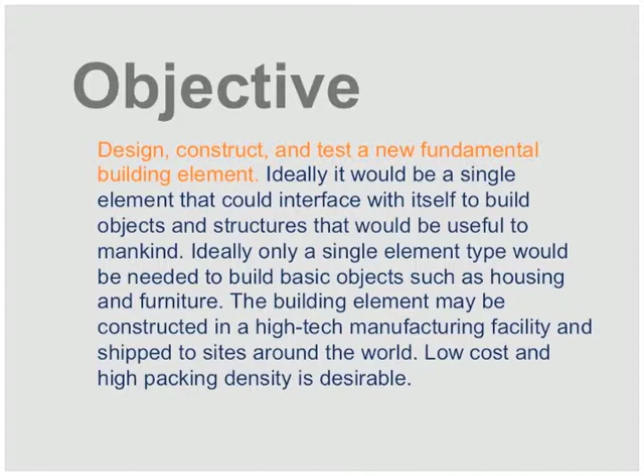And we would want to be able to use this element type for building things like furniture or things like housing. Now, this element can be constructed in a high-tech manufacturing facility and shipped to sites around the world. So for this reason, we will be quite interested in low-cost elements and elements that can be packed in high density. Now, let's dig in a little bit deeper at 5 sub-goals.

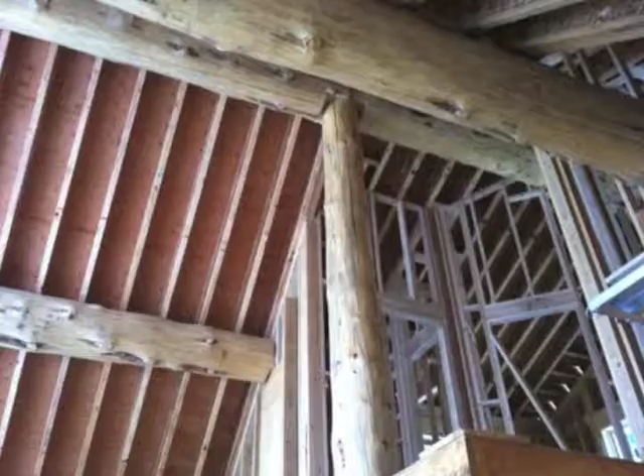The first sub-goal is to develop a modular building system that has a minimal number of unique parts or modules. To better understand this, consider construction in the developed world. That's what this picture represents here. And in this picture, we can see at least 8 different building element types. We also can see a large variety of dimensions to which those materials have been cut.

For this reason, construction in the developed world is expensive. It takes the management of all those different kinds of element types. It takes a craftsman who knows how to size them, cut them, and assemble them together. This is one of the large reasons why housing is inaccessible to so many people in the world. It's because housing can be expensive.

Let's consider the complete opposite of this. In this case, the hexayurt, designed by Vinay Gupta. This is a good representation of how construction can be handled at the complete opposite end of the spectrum. In this case, 12 4x8 sheets of foam or plywood can be used to construct the hexayurt.

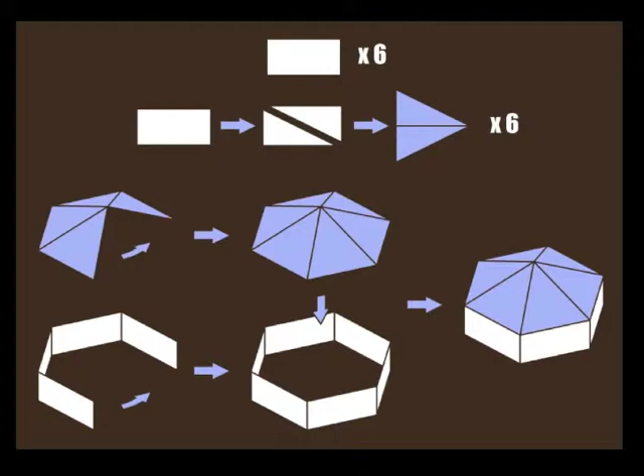The second sub-goal is to develop a modular building system that has a minimal number of unique joints or interfaces. Again, considering the hexayurt, we can see that a fiber reinforced tape is used for all of the joints. In this case, one interface type used everywhere. You can imagine the complexity that grows if we try to have different interfaces for every joint.

The fourth goal of the project is that we develop a modular building system that is inexpensive. A great benchmark here is the ShelterBox. The shelter box is a box that's shipped around the world where disasters have occurred, and in the box is a number of supplies to help a family through the recovery process, including a shelter. And in 2012, the cost of the shelter box averaged $874 US. The hexayurt with the foil backing is estimated to cost $500.

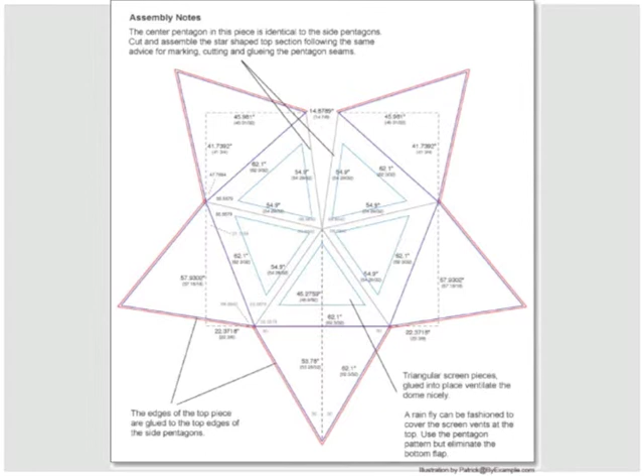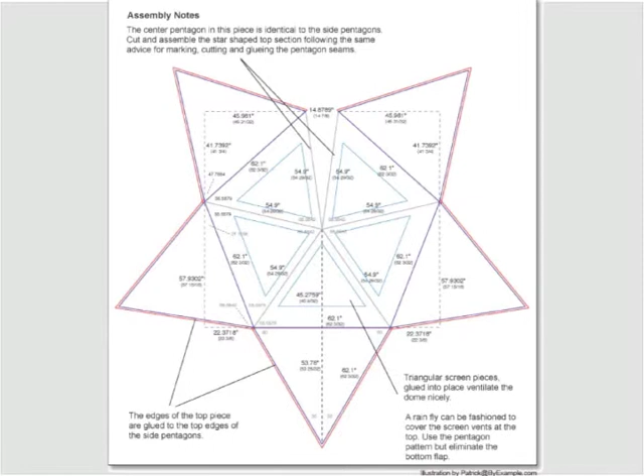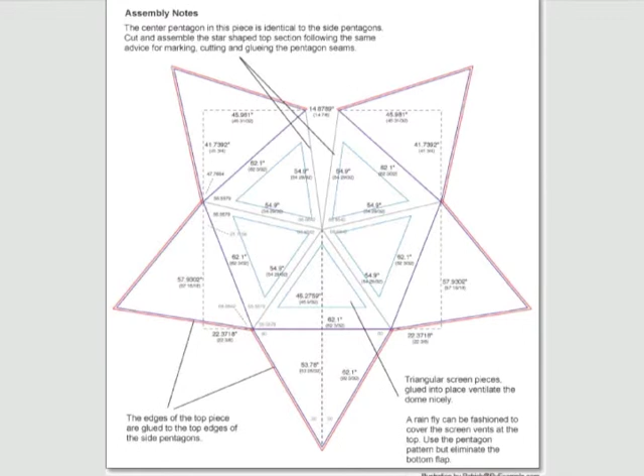The fifth goal of the project is that the building system be properly engineered. We should capitalize on the existing work that's been done in geodesic domes, nerodesic domes, and so many other mathematically based structures. We should contribute to that body of knowledge where possible, and we should most certainly use our best engineering judgment when going about verifying the structural soundness and these sorts of matters for whatever building elements we arrive at.

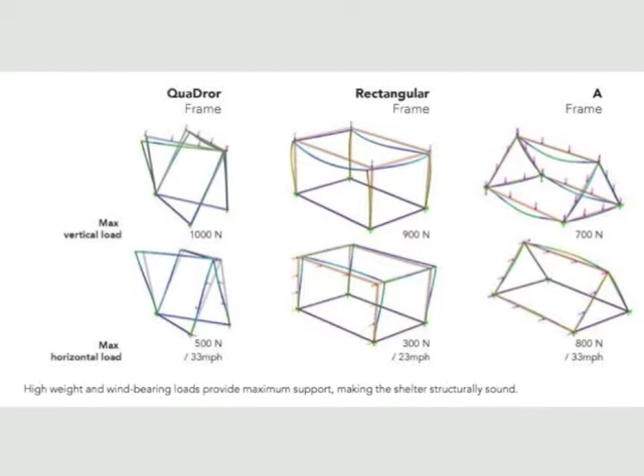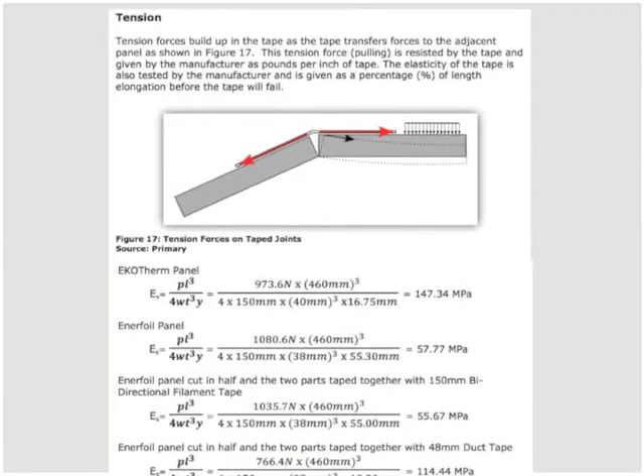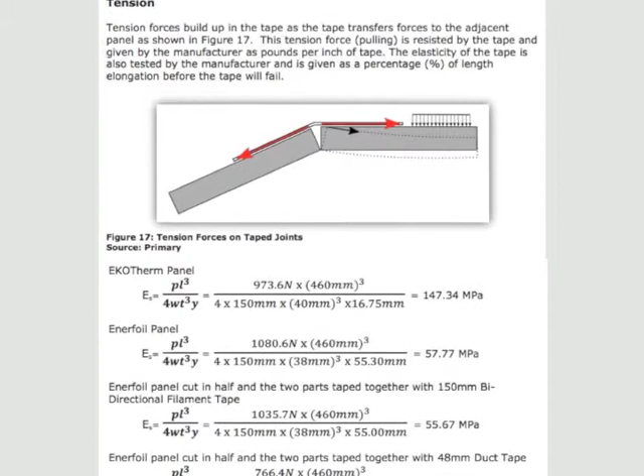It's essential for any new element to be evaluated against existing elements, especially with regard to loads that can be held, both vertical and horizontal loads. It's also essential that we evaluate joints. This is some of the joint work that was done as part of a great report called Analysis and Construction of Nerodesic Tridomes. This was written by Maxwell, Susskind, and Yang.

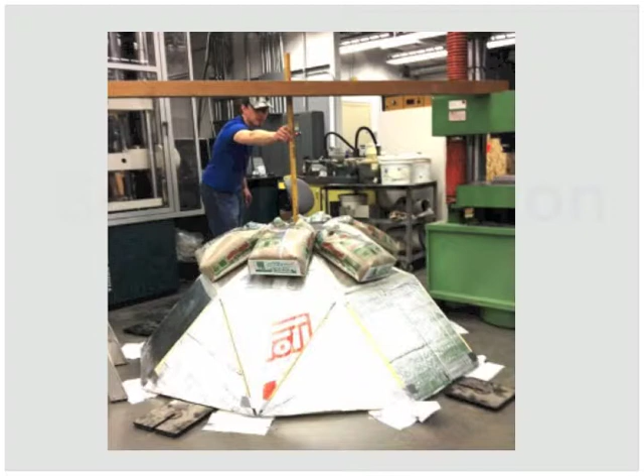Of course, the engineering work is important, but it must be followed up by proper testing. Now for some things to consider as we go forward, creating a new kind of building element or building system. Some inspiration.

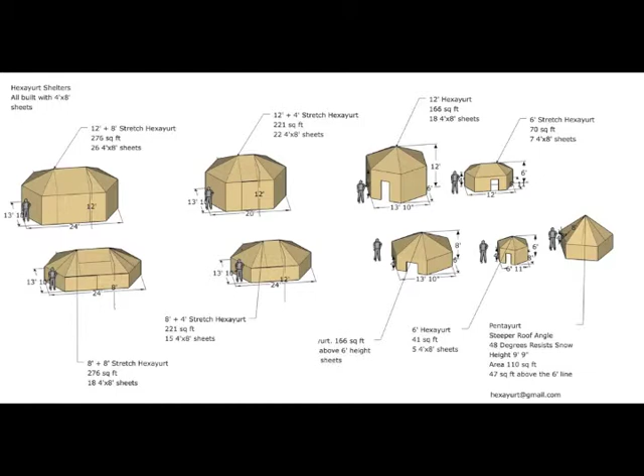Here's Vinay Gupta's Hexayurt shelters. I just love how this is made just from 4x8 sheets. There's virtually no waste other than what's in the kerf when it's cut, and it's expandable. You can see the variety of structures that can be created just by 4x8 sheets.

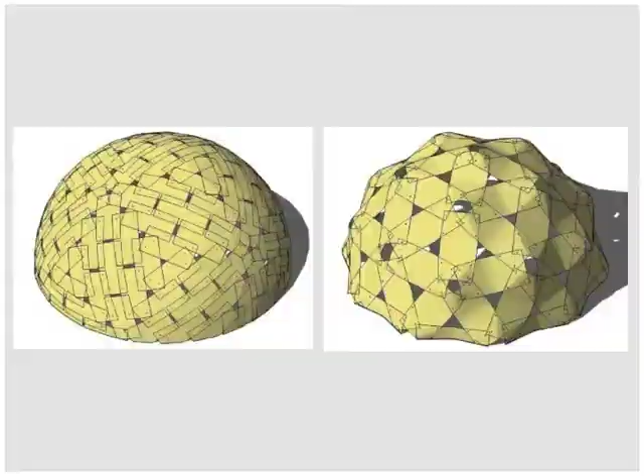There could be ways of using the principles of finite element meshing to identify shape structures that could be used to create any building or object or thing of this sort. Also, there's a large amount of work that has been done in terms of geometry and mathematics. We must pay attention to this and not reinvent the wheel.

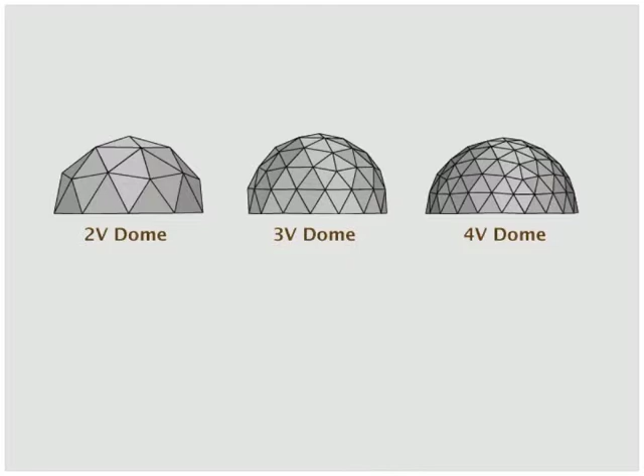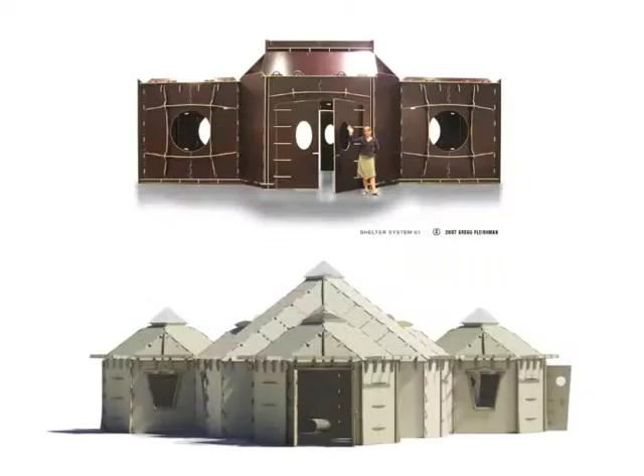Switching gears a little bit, we need to think about not just how simple pieces can go together, but how more complex pieces could go together. And I'm really inspired by Gregg Fleishman's work here. These are emergency shelters, all made by 3/4 inch plywood, and it's beautiful. And again, the concept of expandability or modularity is really a fundamental one here, even in Gregg Fleishman's work.

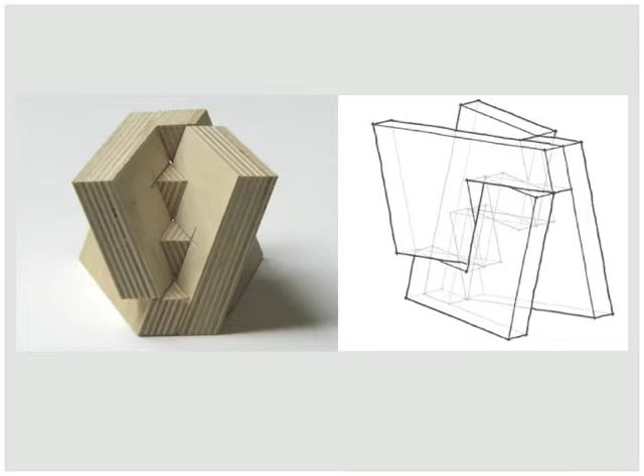Again, switching gears, let us think now about more complex fundamental building blocks. This is the QuaDror, an amazing new building element developed by Dror Benshetrit. This is called the QuaDror. The QuaDror packs flat and can be opened to create, in essence, a box that can be used then for structures. In essence, it's like a folding brick.

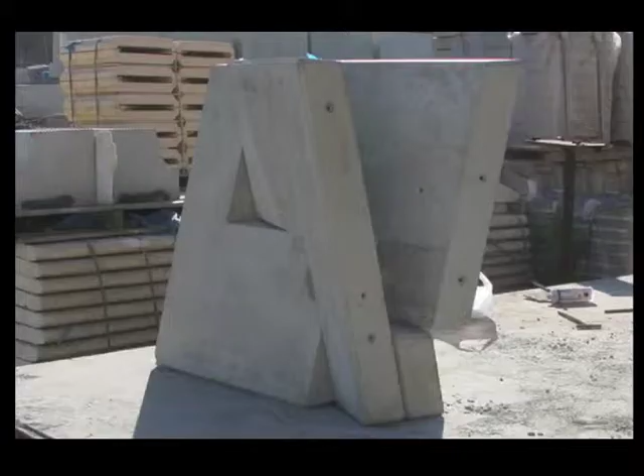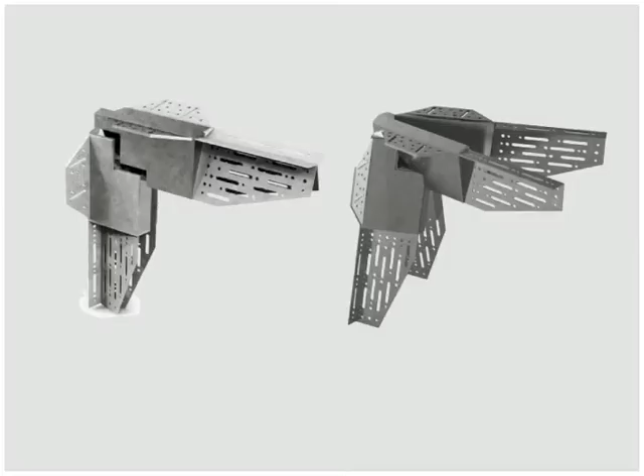One of the things I like about the QuaDror is that it's based solidly in geometry. And what that means then is it can be made from a variety of materials. That kind of flexibility is really, really a valuable thing in my mind. Although this is a rendering, you can see the idea of this being molded out of plastics.

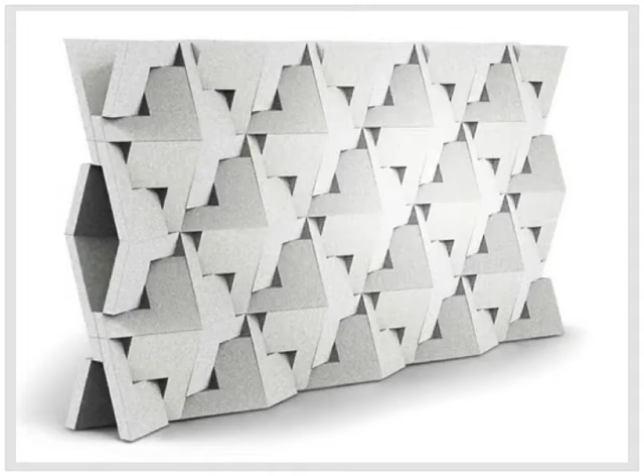You can also start to see that there are some connection pins that exist between the Quadrors so that they can be stacked and held in place. There's a great series of videos and good descriptions of the Quadror at quadror.com. I really encourage you to look at that and get inspired by some of the things that are discussed there.

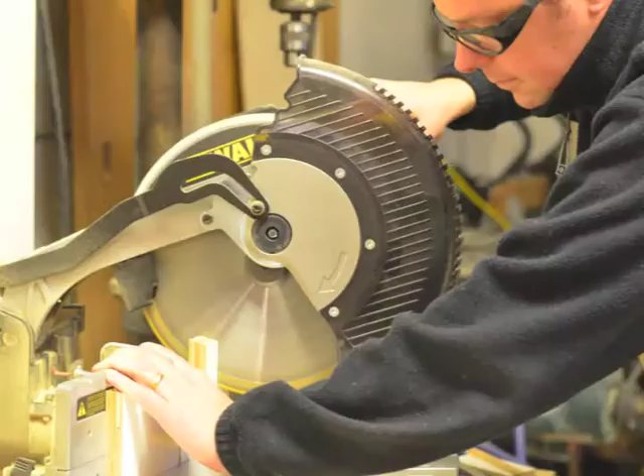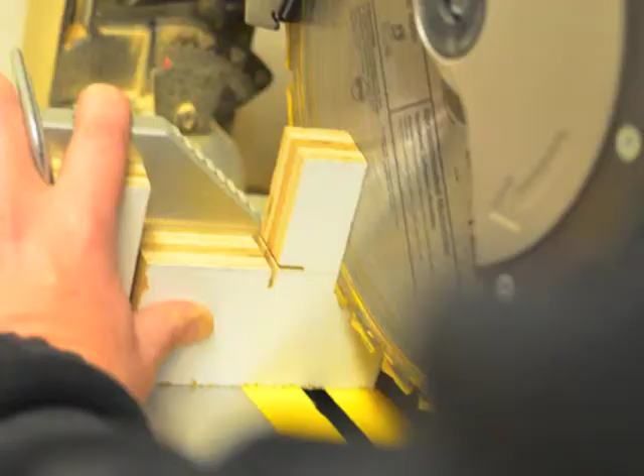I got so interested in this Quadror that I had to make one this weekend. And one of the things I noticed immediately is that there aren't any plans for how to make these things, and it can be a little bit complicated. Most people that I read about on the internet who had made the Quadror used their table saws. But there's one particular cut that doesn't work very well on the table saw, and it requires some tricky maneuvering. Instead, I made my Quadror completely using my chop saw.

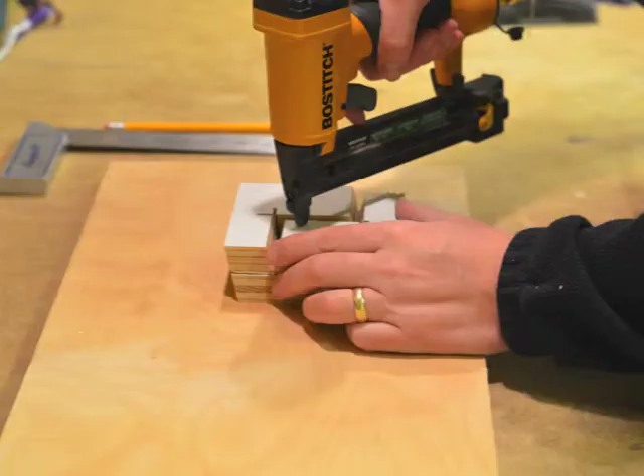The Quadror is constructed with 4 identical pieces. In the end, 2 pieces are connected together and 2 other pieces are connected together, and you have 2 moving parts that are interlocked with each other. Once I had them in place, I simply used some nails to hold them together. In the end, this is the Quadror that I created.

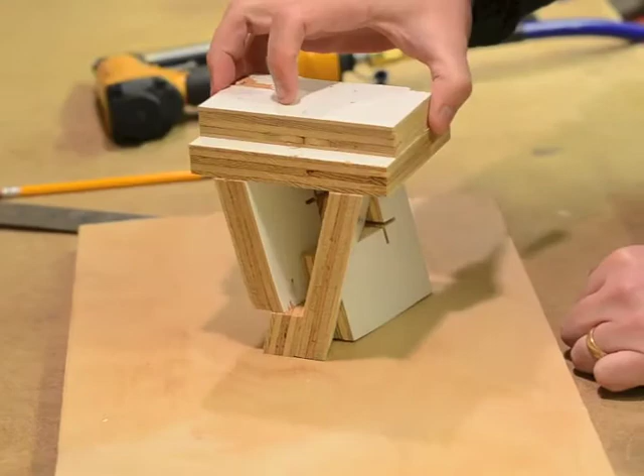One of the things that I like about this is, by the way all the bevel cuts are made, when it's open, everything is either planar or at a right angle to itself. So in the end, it's exactly like a box, except it isn't. You can see the hinging movement there, designed to support load on the top, such as this.

So in the end, we have an opportunity to put our creativity and engineering skills to work, trying to create a building element that can make a difference in the developing world. A building element that can be used to create furniture, to create housing, to create things of this nature. Whatever we do create has got to be better than the hexayurt. It's got to be better than the Quadror. And this is going to be difficult because those are amazing innovations in my mind.